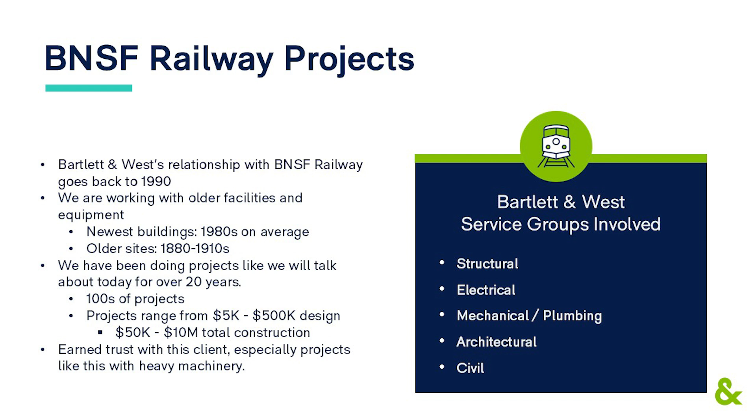So my team provides predominantly MEP and structural services and architectural services for their maintenance facilities all across their network and system. So we get around a lot. We travel to a lot of their different sites and facilities all across the Midwest, but these are rail maintenance facilities. So outside of their corporate offices that we help them with too, we get into some really interesting projects. It's probably some of my favorite work that we do for them.

We work in a lot of old facilities. I would consider a new facility for them to be 1980s on average. And then most of what we work on are 1880 to 1910s. I mean, these are 100-plus-year-old buildings. So there's a lot of components that go into that.

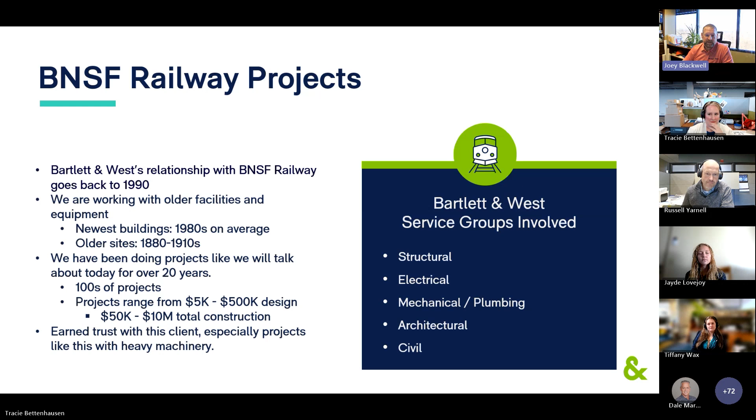Obviously, we evaluate these facilities from time to time for them to make sure that they understand what is needed to keep the building itself functional. And then there's all the components within the building that support the processes and maintenance services that are performed in there.

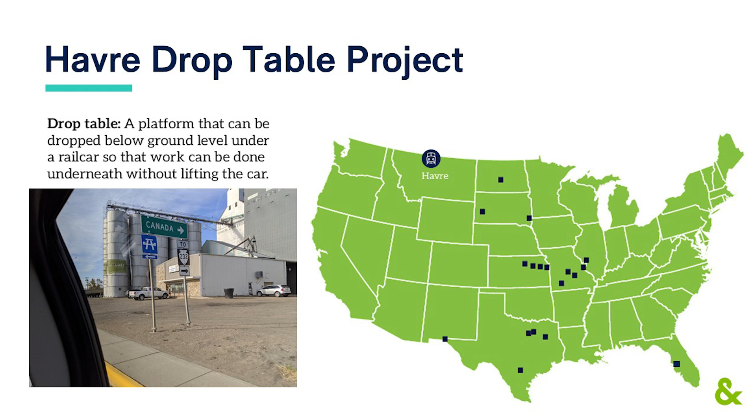So Havre is north central Montana. I can't remember how many miles it is from Canada, but you're getting close. And it's a main spot up on what they call their High Line. They have a shop built, I want to say 1944, 1945. And they have a drop table.

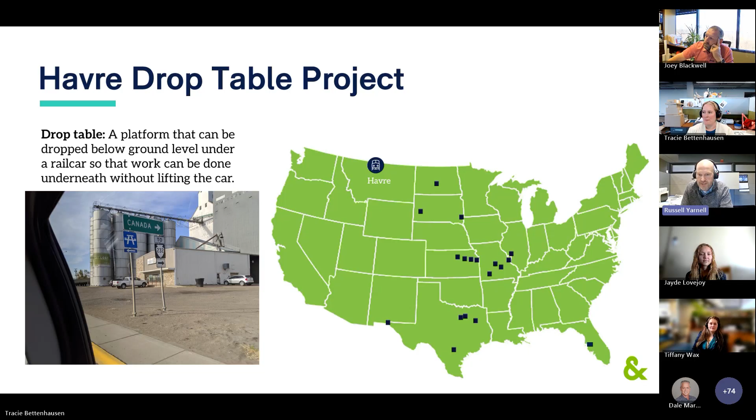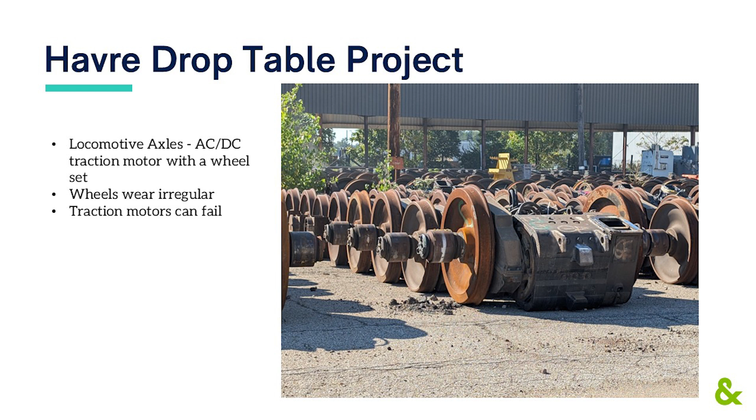Traction motors are what drive the locomotives. They have a wheel with a motor attached to the side, usually 6 per train unit. And as you can see in the picture, this is a storage area where they have used ones. The wheels wear down differently. They can get irregular wear patterns on them. The motors can fail. There's some other things that can go wrong with them. So they basically have to change them like you change tires on a car or truck.

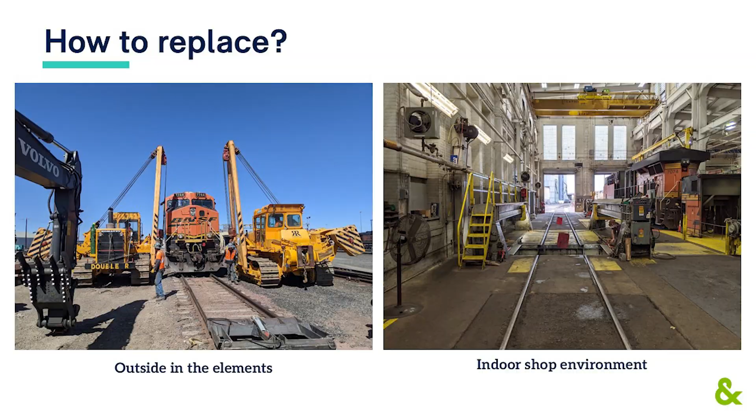Inside Havre, they have 2 tracks where they can drop the traction motors. When we arrived there, only one of the surfaces worked. The other one was defunct for some reason. The work surface can drop out and you can drop a single axle. The whole table can also drop out and you can drop all 3. That's the drop table. That's the existing system that was there.

Everything was well worn. The old lift mechanism was threaded units. The newer one they wanted was hydraulic, so easier to repair, easier to replace components like valves and hoses. The old threaded mechanism would just wear out.

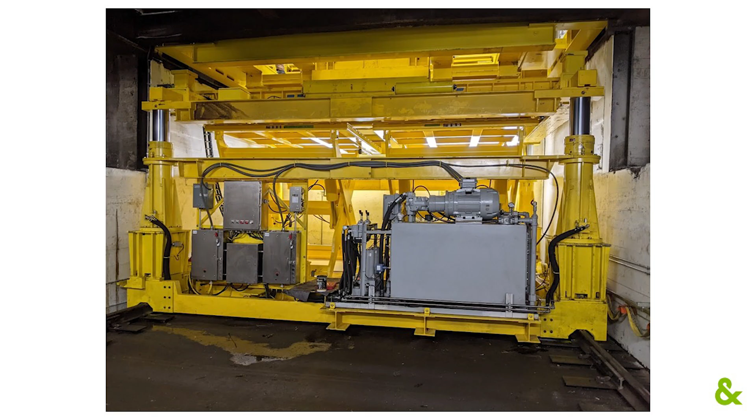And so instead of having 4 threaded bolts essentially on each corner, lifting that table up and down, now you got 4 cylinders. There's some tables in the middle that can do finer adjustment, and overall it can lift 120 tons to handle those locomotives and their weights.

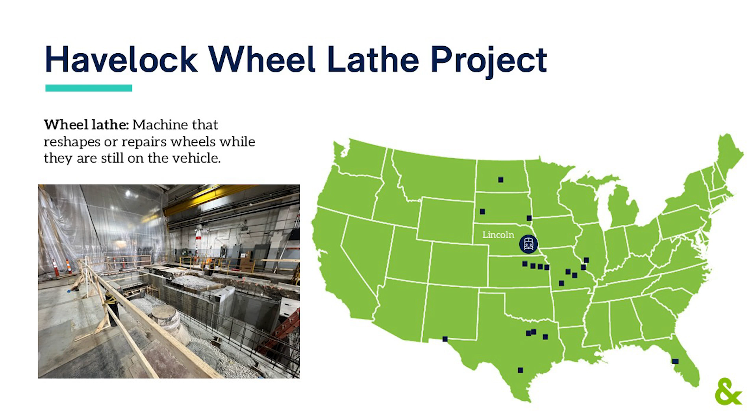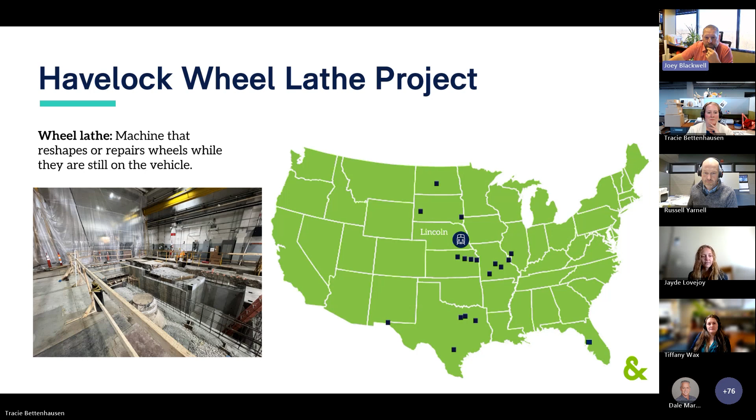So this project is one of those really cool ones. It's one of my favorite projects that we've done for BNSF. It's actually the second one we've done. We did an exact model of this type of wheel lathe in Topeka, I believe 2018, 2019 timeframe. And then we just finished this one up in Lincoln this last year. The need here, this is a high production facility.

Now, this is a very expensive machine. The machine itself is over a $2 million purchase. It is manufactured in Germany. It takes over a year to build it, test it. They have mock pits in their facility. They put it all together and make sure it works, and then they break it all down into a bunch of little pieces and put it in crates and ship it across the ocean.

And hopefully, by the time it gets there, our hole in the ground is ready for them to set this machine on. And since we've done this before and we were highly successful with it, and this is a very technical project, they called us back on this one, said, you guys got to get involved. We got to make sure that this thing's ready to go when it gets here, because when I spend this kind of money on a machine, I expect it to start working the second it hits the ground. So this is just what it looks like in the shop before we got started.

Now this machine, you can see some of the wheel sets in the background there that it picks up and it lathes them down. It resurfaces the wheel. So again, these things, the axles themselves weigh about 800 to 900 pounds a piece, depending on the type that it is. And then the wheels themselves also vary in weight, but roughly about 500 pounds a piece. So you're over 2,000 pounds per wheel set. So this machine picks it up, profiles it, it scans it with a laser, does all of its fancy calculations, and it starts lathing it down.

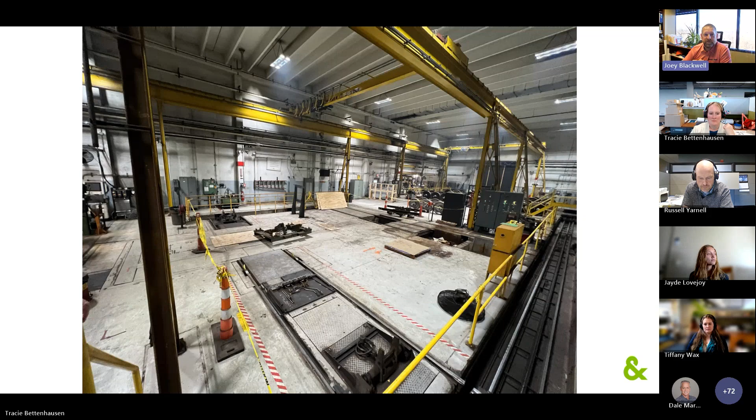And bang, we started digging a hole with a very large excavator inside of a building. So you're driving through an overhead garage door and you're putting plating down over existing tracks to make sure you're not damaging anything, and then you're going to town with a rock hammer, essentially. And here we got some of the formwork that has been pulled off on some of the initial pours. So this is where you can start to see some of the magic happening and coming together.

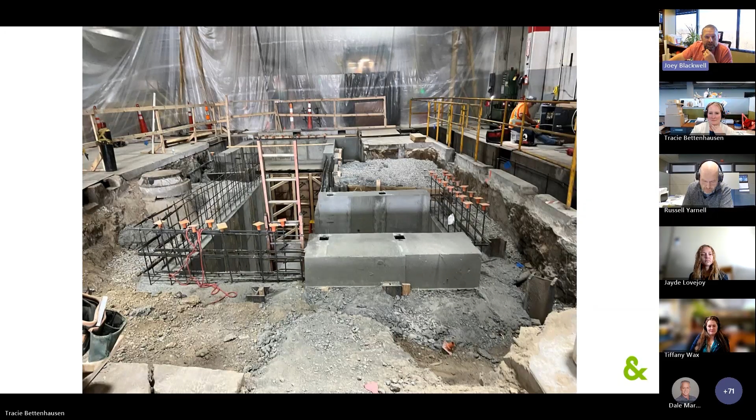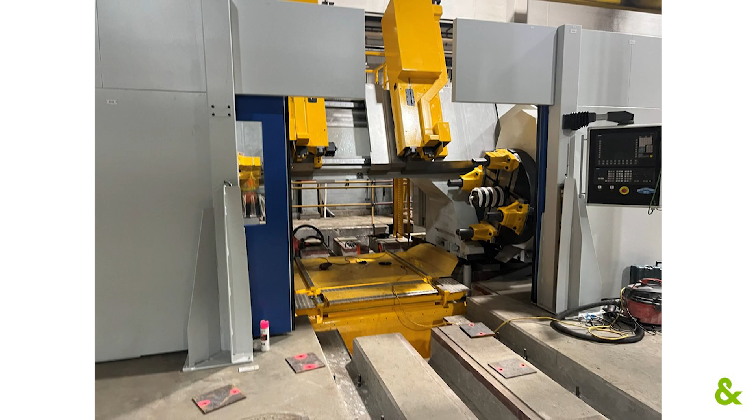Now here's a picture of the actual machine after it's been set. Now it hasn't been fully commissioned yet. The rail isn't in there, but you can see it's a pretty good sized machine, and they look pretty sharp when they're brand new. They got a lot of smarts and gadgets on them. You roll it into it, it captures the wheel set, it locks onto it with these wheel chucks on the side. It's got one on each side.

These heads on this wheel lathe, they're about 50,000 pounds a piece on their own. So they're well equipped to pick up that 2,300 to 2,500 pound wheel set and spin it around and do whatever they need to do to them to get them profiled back to the right specification.

We certainly are appreciative of having that flexibility to do all of that in-house for them. That's another trait of ours that they really enjoy having access to, and they know that they can call us, and there's really not a whole lot that we have to reach outside of our borders for to service their projects. So we pretty much keep it all in house. We do it well. We understand how they like to operate and what their needs are, and it's just a really great partnership all around, and it couldn't happen without great team members. Blessed with that, and appreciate being able to work with them every day.